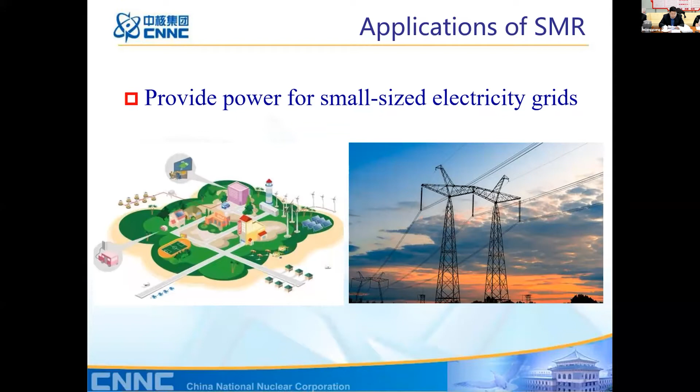SMRs could provide power for small-sized electricity grids. In the energy market of developing countries, small or medium-scale reactors are drawing more attention due to the limited power demand and requirement for net stability. Small plants can avoid the embarrassment of frequent low power operation of a large reactor deployed in a small size electricity grid.

SMRs could be used for regional heat supply. 140 cities of northern China are using centralized heating in winter. These cities cover almost half of the land area in China, and the population there is more than 700 million. In China, the industrial heat demand is around 1 billion tons of steam, equivalent to 120 gigawatt heat supply, taking 10% of total emission of greenhouse gases. In North China, heat is supplied for 4 to 6 months per year, with a power demand of around several hundreds of gigawatts, or 15% of total energy consumption.

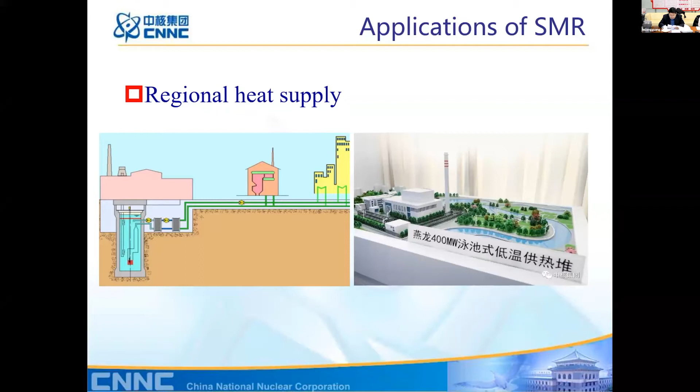SMRs could be used as floating power plants, providing stable electricity for ocean resources development and island energy supply. SMRs could be used for seawater desalination. 90% of Chinese coastal cities are in lack of fresh water. Seawater desalination can be a stable water source, which is free from seasonal climate change.

The development of SMR in China. SMR R&D has been carried out since the 1980s in China. Most SMRs are of pressurized water reactor type and integral design. Heavy metal SMRs are still in a very early stage. Integral SMR of PWR type is state of the art and its deployment has been started. Multifunctional application is of great interest: a comprehensive design for power production, heat supply, seawater desalination, etc., among a variety of designs.

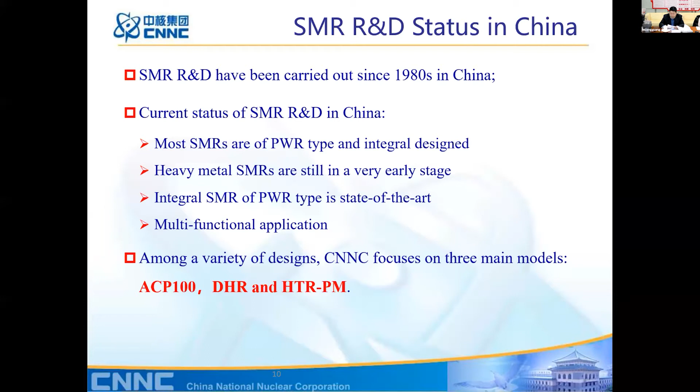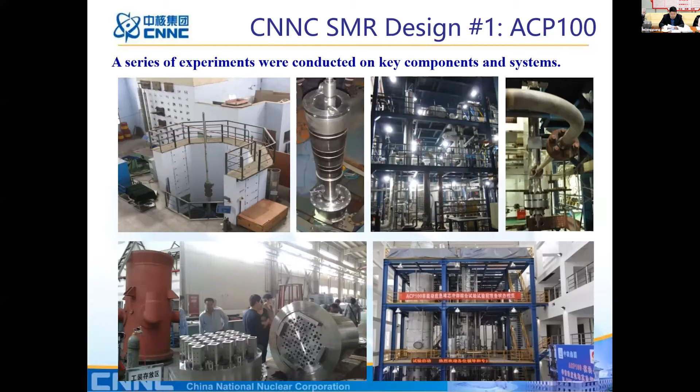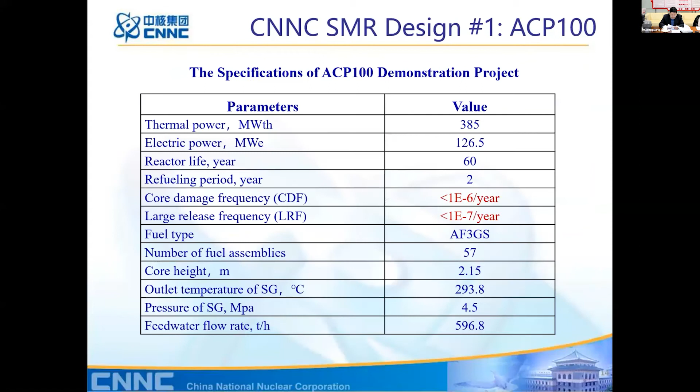CNNC focuses on 3 main models, such as ACP 100, DHR, and HTR-PM. The ACP 100 is based on 50 years experience on small reactors and 30 years experience on power reactors. The preliminary design was completed in 2015. The ACP 100 is based on existing PWR technology. A series of experiments were conducted on key components and systems. Mock-ups of key equipment were tested. This is the specifications of ACP 100.

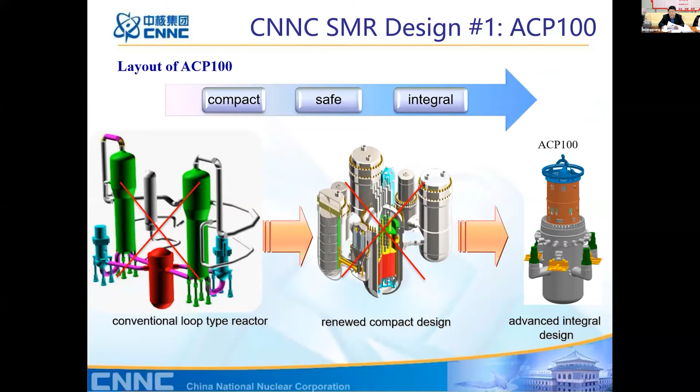The ACP 100 adopts a one reactor, one turbine design. The integral design eliminates the possibility of large break loss of coolant. The passive safety design makes it safer than the Generation 3 standard. The ACP 100 reactor design passed the generic reactor safety review of the IAEA on April 22nd, 2016.

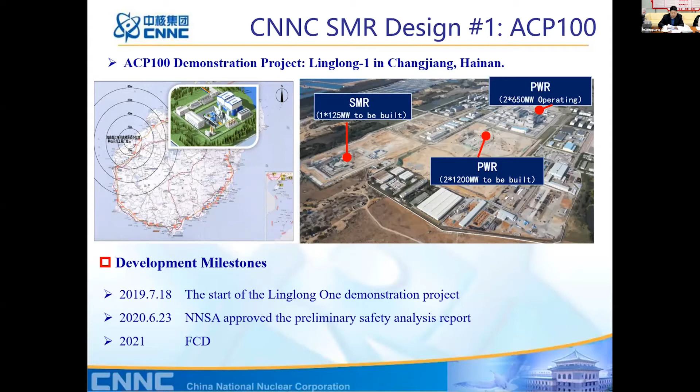CNNC announced the start of the Linglong One, which is ACP 100, demonstration project on July 18, 2019 in southern China, Hainan province. The National Nuclear Safety Administration approved the preliminary safety analysis report on June 23rd, 2020. The first concrete of the demonstration power plant is expected to be poured in 2021. This is a picture from the SMR site on June 30th, 2020.

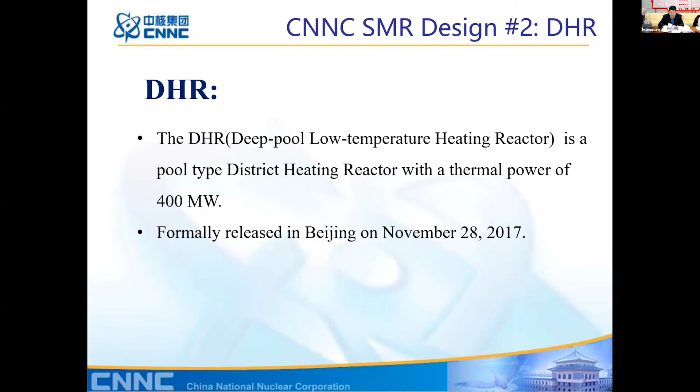The DHR is a pool-type district heating reactor with a thermal power of 400 megawatt, formally released in Beijing on November 28, 2017. Just as I told you, a small reactor should be less than 300 megawatt, but this 400 megawatt is thermal. The DHR is developed on the basis of the light water swimming pool reactor. CIAE's 49-2 reactor served as a demonstration reactor of the DHR 400 program. This is a specification of DHR 400.

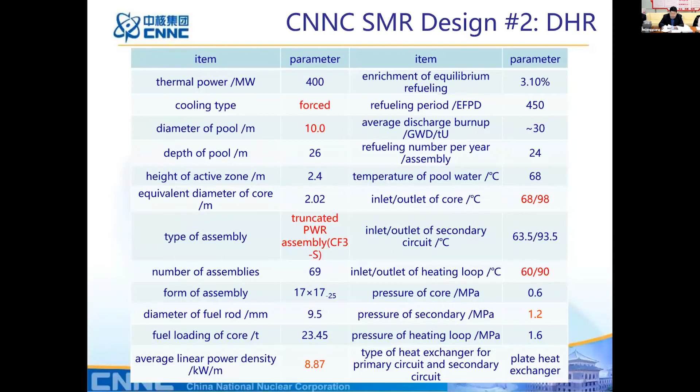DHR 400 is a multi-purpose application reactor for district heating, seawater desalination, and radioisotope production. It is capable of heating a construction area of up to about 20 million square meters, equivalent to 200,000 three-bedroom houses. According to these calculations, a single DHR 400 can supply heating for nearly 500,000 citizens, roughly the average population of a Chinese county.

DHR operates in low temperature and normal pressure without the need of offsite emergency, and is featured with zero emission, zero coal consumption, easy decommissioning, and low investment requirement. It is advantageous in economic efficiency, with price of heat supply far superior to gas-based heating and comparable to heating by coal-based cogeneration of heat and power.

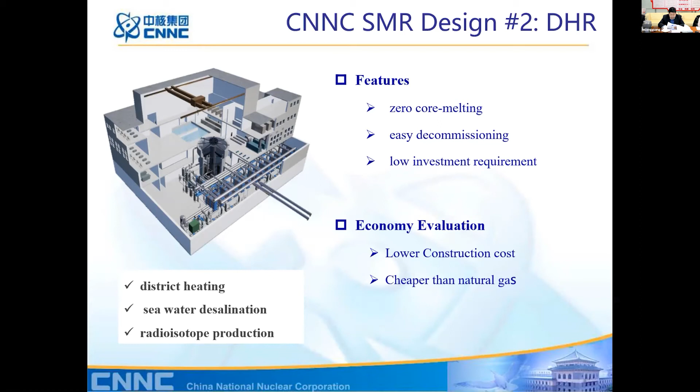CNNC initiated the demonstration program based on the 49-2 reactor in April 2017 and achieved effective heating supply for 3 office buildings on 20th November 2017. This is the first step of CNNC's 3-step strategy of heating supply using a pool-type low-temperature reactor. The second step is establishing a demonstration project. The third step is commercial application. CNNC officially submitted the project proposal to NEA on July 6, 2020. The demonstration project is planned to be built in Liaoyuan, Jilin province.

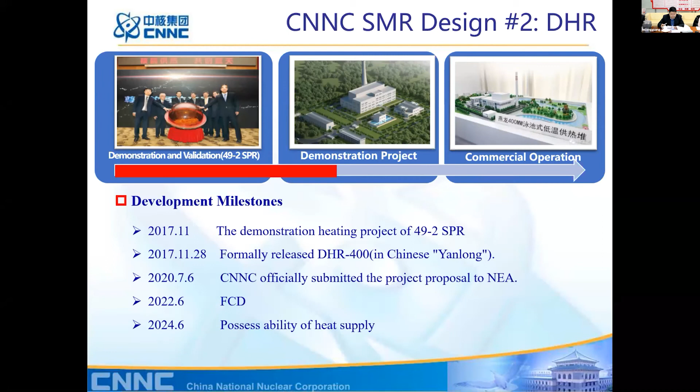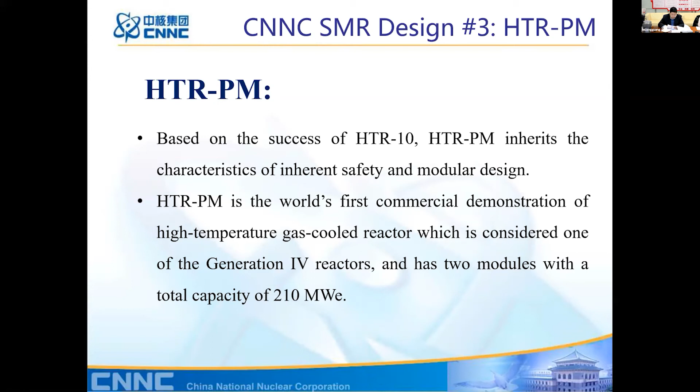HTR-PM is based on the success of HTR-10, inheriting the characteristics of inherent safety and modular design. It's the world's first commercial demonstration of a high temperature gas-cooled reactor, which is considered one of the Generation 4 reactors, and has two modules with a total capacity of 210 megawatt electricity. HTR-PM has inherent safety features due to lower power density, good coated particle fuel performance, large negative temperature coefficient, large temperature margin, and other balanced system design. The decay heat can be passively removed from the core under any design accident conditions by natural mechanisms. This eliminates the possibility of core melt and large release of radioactivity into the environment.

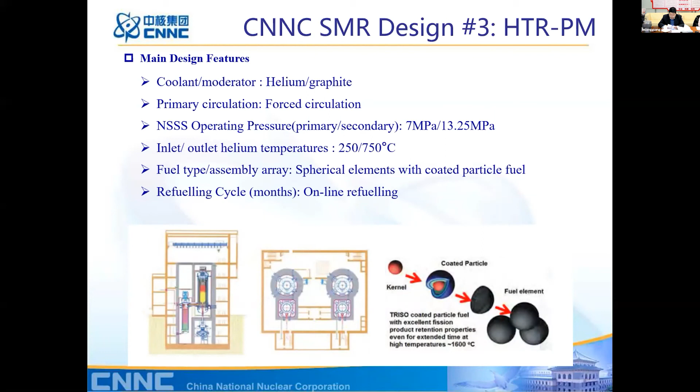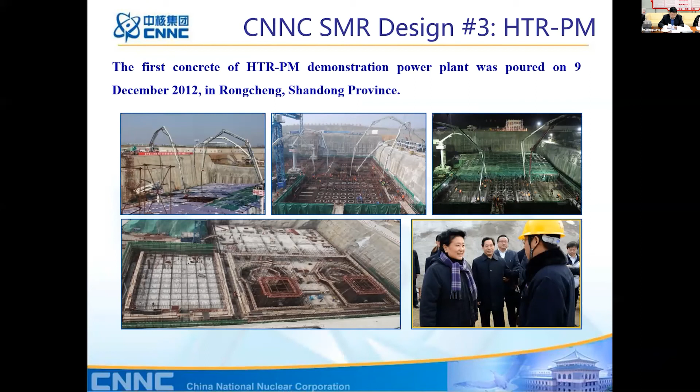The first concrete of the demonstration project was poured on December 9th, 2012 in Rongcheng, Shandong province. Up to now, the cold function test of the two modules was completed. The hot function test just started 30th December 2020, and it is expected to reach criticality in 2021 and to be put into commercial operation in 2022.

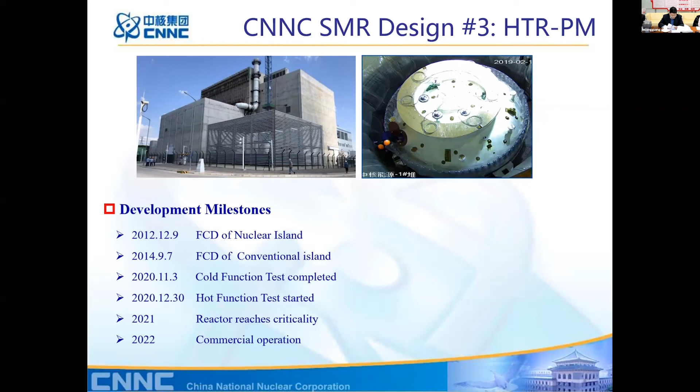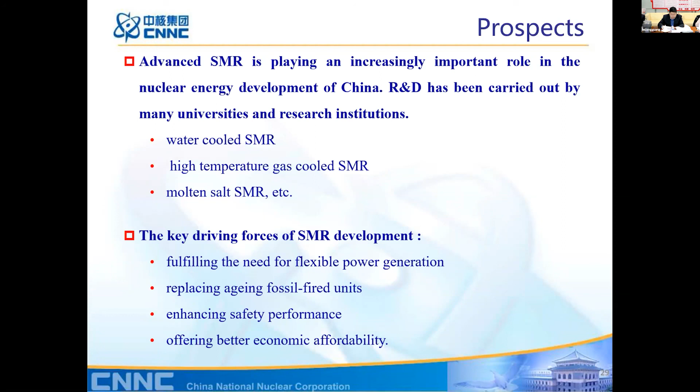However, the development of SMR is still facing many challenges. More work should be taken in many aspects, including but not limited to establishing regulations, design standards, and supervision systems for SMR, obtaining public acceptance of SMR, implementation of passive safety, and improving economic competitiveness. Thank you.